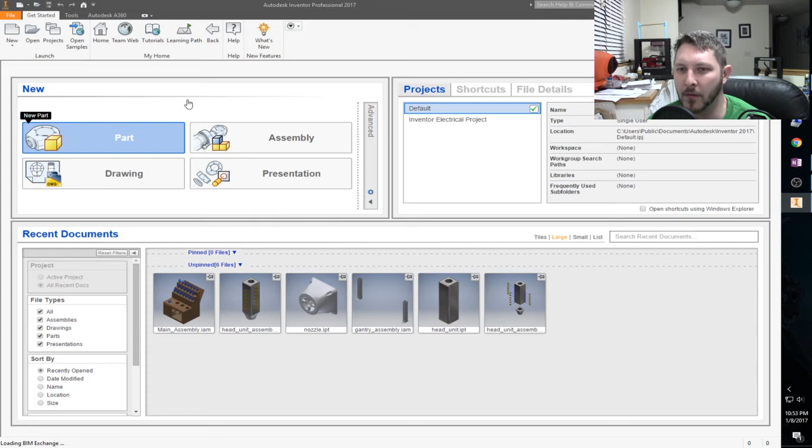So first off, let's get into this. We're going to start with a part. I'm going to use Autodesk Inventor Professional 2017, that's what I'll be using, and we're going to be creating this all together. So sit back, relax, and enjoy some time together while we see if we can create this up.

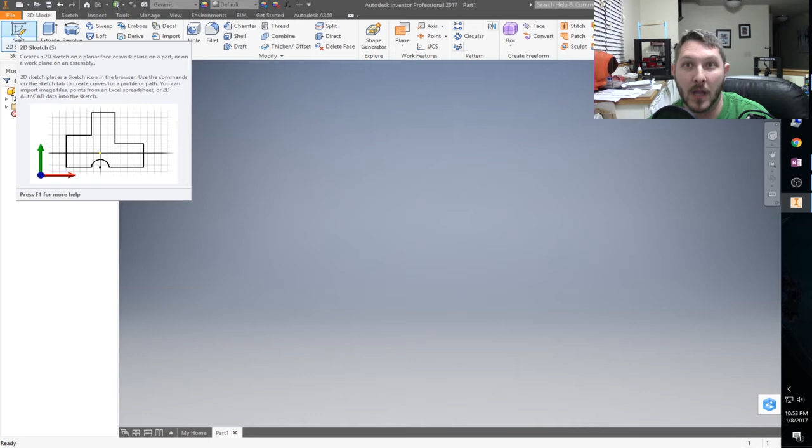So I have a Pokemon card. I actually have one, so I'm going to be measuring it whilst we speak. It's going to be rough measurements, got me a tape measure, so it's going to be rough measurements, forgive me as we go.

So I'm going to start a 2D sketch. Let's go the YZ plane. That's fine with me. So ultimately this is just going to be a rectangular surface.

So let me take a measurement. Oh, let's see, it's going to be about 2.5 inches wide. So let's go to the other one, 2.5 inches wide by approximately... get this on here and measure this out. Looks like 4, and let's see, that's going to be 1, 2, 3, 4, so 3, well it's 8, so that's going to be 1, 2, 3, 4, 5, 6, 7 sixteenths.

So, 3, is that what that is? It's going to be 3 and 7 sixteenths. So about 3 and 7 sixteenths.

So I'm going to, well, we better make it a little larger, right? We don't want to make this exact, because if we make it exact, then it'll just barely fit. Let's just round up, shall we? And let's go 3, or no, 2, yeah, 2.5 wide. Yeah, let's go 3.5.

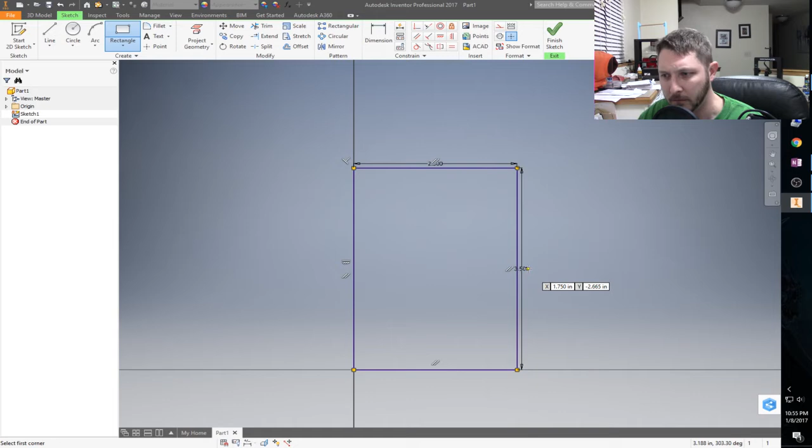And that'll be at first. We'll make the box as deep as a card is tall, is what we'll do for now, and we'll extrude this up 3.5. So we're going to finish the sketch, and then we are going to choose to extrude this up 3.5 inches. So it'll be just about as tall as it is long. So there we go, that should be 3.5 inches tall by 3.5 inches long by 2.5 wide.

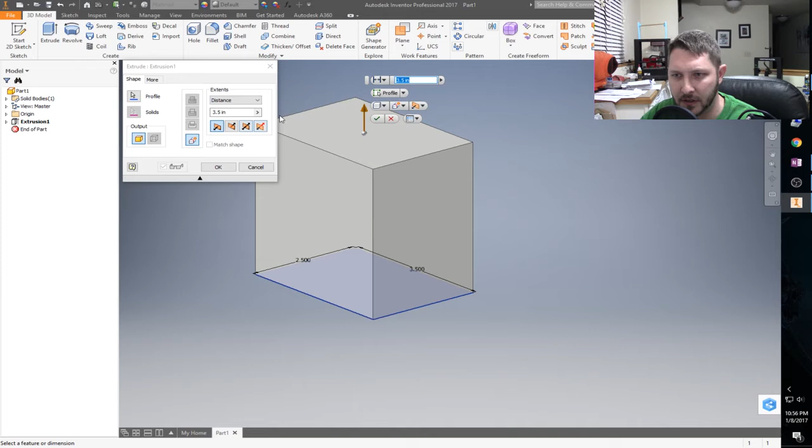Or actually, we want to make this where it's actually a double box where it has a lid. So let's cut that in half. Instead of 3.5, let's do 2.25 as my extrusion. To correct an extrusion, you just double click back on it. Let's do 2.25 tall, that looks a little better, that way it comes halfway up the card. Sound good? Sounds good to me.

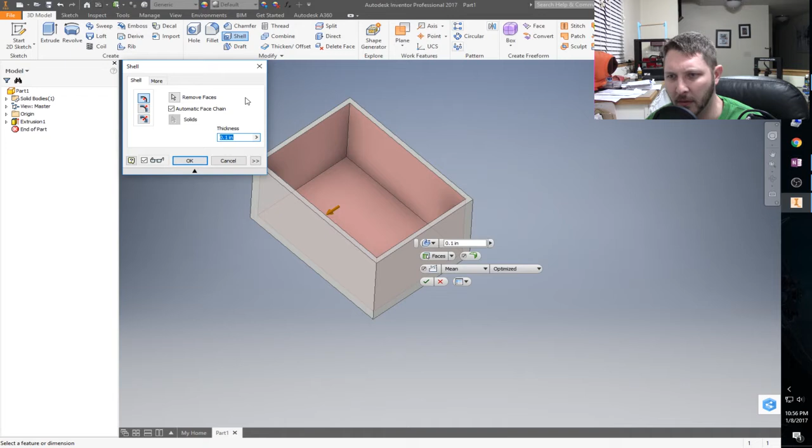All right, so now we got to hollow this out. So we are going to use the shell tool. We're going to shell it on that surface. 0.1 wall thickness, yeah that's probably fine. Let's give it a little more girth, let's make it 1/8 of an inch.

I'm here in America, so we do everything in standard. Yeah, I know, it's goofy. We got eighths and 16ths and 32nds and 64ths and weird stuff like that, but I don't know, I have thought in it for a very long time, so that's the way I roll in it.

So there's that, that's pretty nice. That's going to be the bottom. So what we're going to do is we're going to save this. Save, let's just put this, I'll put it on my desktop for now. We'll call this bottom box.

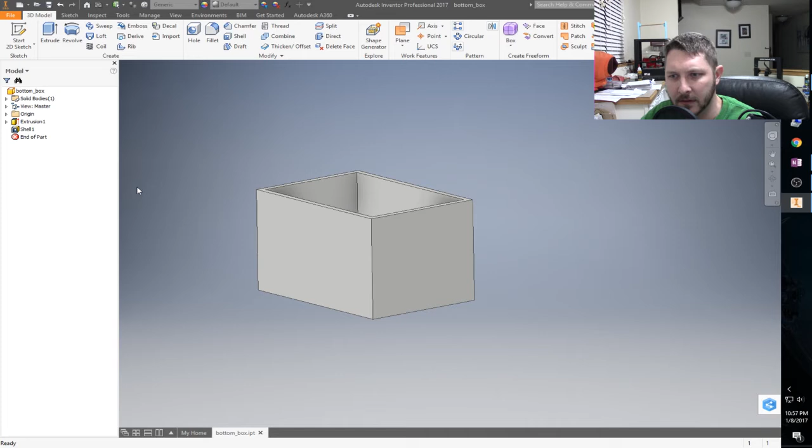Okay, bottom box. So now we need a new part. Come up here to my little quick thing here and hit new part. We're basically going to start a 2D sketch again. This time, this is going to be the top.

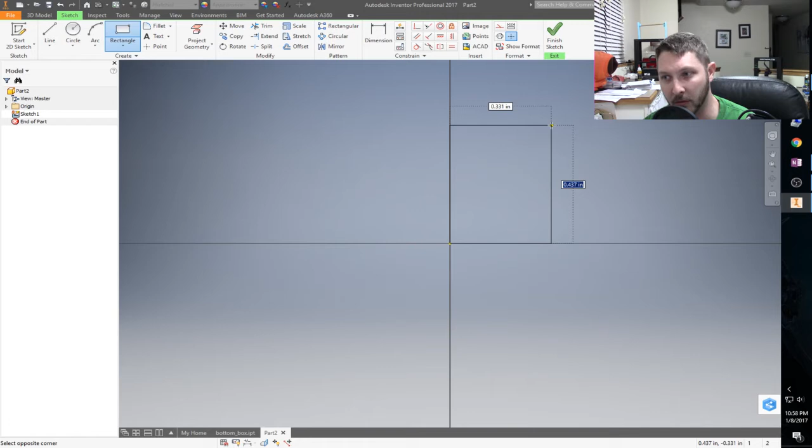If it's going to be 1/8 of an inch thick, we made that other one 2.5 by 3.5, right? So this one is going to have to be a little bit bigger. Let's go 1/8 of an inch bigger. But then we'll probably make the wall 1/8 of an inch, so let's make it 1/4 inch bigger. So if it's 2.5 by 3.5, a quarter more it'll be 3.75, and then the other will be 2.75. So there we go.

So now, since we got 2 3/4 by 3 3/4, we'll go ahead and extrude this up. Probably do the same thing we did before. What did we do that at, 2 1/4? Well, we probably don't want to do 2 1/4. Well, we probably could. Yeah, that's fine. So we'll do 2 1/4 like that.

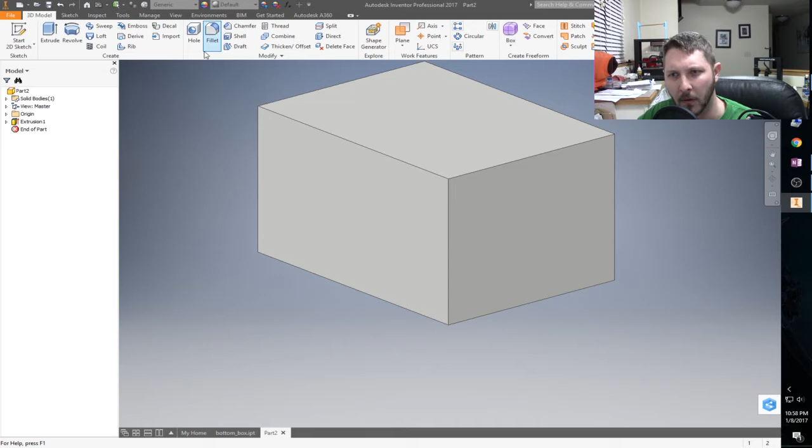But this time we want to go on the bottom. We're going to shell it out from the bottom. So we're going to do a shell, and then same deal. Okay, so that should be the bottom of it.

Okay, cool. Now, should we make these boxes look cool? At least this one, since it's the outside, what you're going to actually see. So let's make this look cool. Let's go with fillets, and let's fillet the corners. Why not, let's make it look cool. A 1/4 inch fillet looks fine, or 1/8 inch fillet looks fine with me. So I'll round that all out.

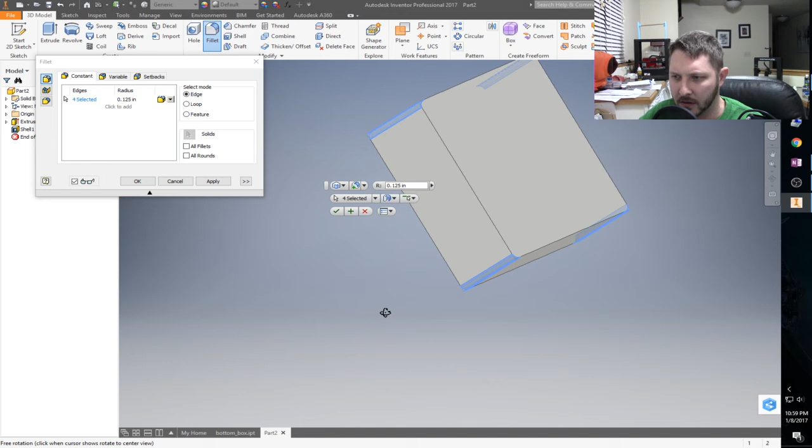Should we go ahead and do these sides too? Might as well make it look pretty. Okie dokie smoky, there we go. Doesn't that look just spiffy?

Now, if I remember right, there is a way that we could emboss on here. Ooh, we could emboss on here a Pokemon deal. So let me see if I can find an image.

Okay guys, I think I figured it out, or at least figured out a different way around it. I'm going to be using a Pokemon font from dafont.com. So what we did was I downloaded that as an executable, extracted it here, so I've got a Pokemon Hollow Text and a Pokemon Solid Text.

Now all you do, if you're using Windows 10, is you just go to fonts in there, and then you just literally drag and drop them into here, if you don't know how to do that. If you're using Windows 7 or the other ones, it's in your control panel. You just open up control panel, and there's a fonts control panel object, you click on it, and it opens up this folder. So real easy to install fonts.

Then of course you have to restart your software, so I shut down Inventor, and I'm going to fire Inventor back up again. So we'll give that just a few seconds to come back up. Gosh, it's just a pain. I think it'll work easier with a font than the other way.

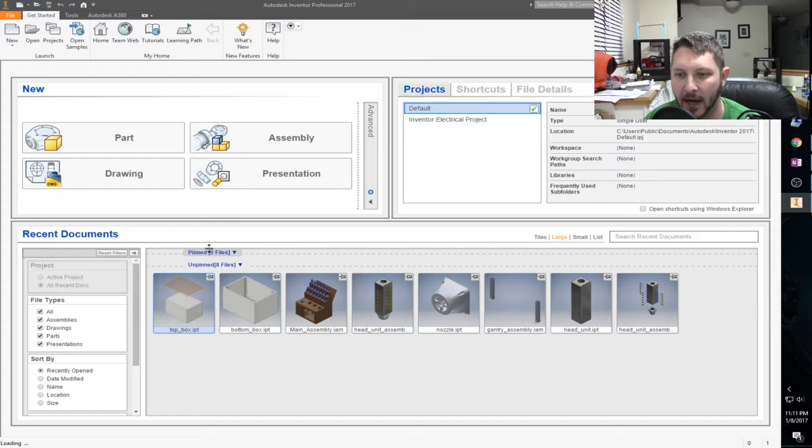So what we're going to do is get the top of our box back. So wait for that to load up. There we go. Alright, so now our sketch number 2 is what we were using. I'm going to roll this over to the side here. So now I'm going to insert some text.

I'm going to change this to the Pokemon Hollow font. I'm going to say... ooh, I don't know how to do the funny E. How do you do the accent E? Does anybody know that? Hold on, let me get this bigger first.

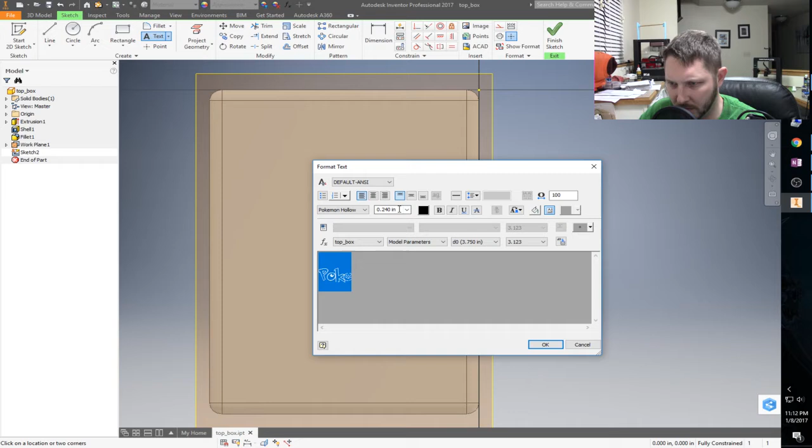1/4 inch, nah, let's do 1/2 inch baby. Oh, that's not what I wanted. Oh no, open that up. There we go, okay, that's fine.

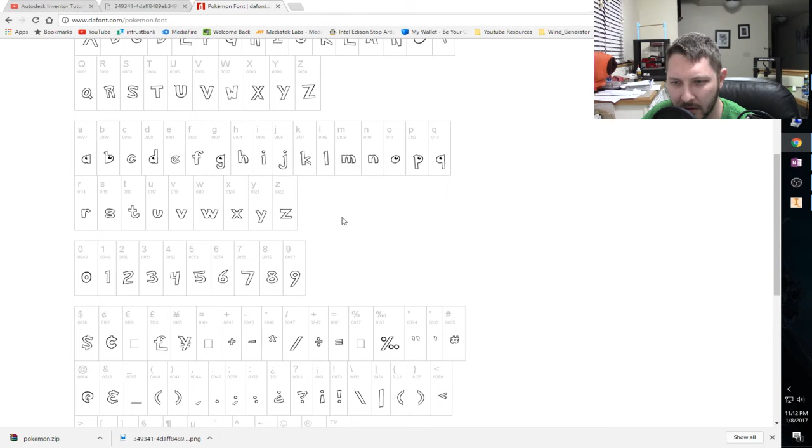Ooh, we're gonna have to rotate it. Is that uppercase, lowercase? Yeah. Does anyone know the alt code for the accent e, or whatever? Because you need that. Do they have it in here? Do they have it? I want the lowercase version. There it is, oh my gosh. Is it an E like that, or is it a... what is it? I think it's an E like that, right? Right? What does that say? An E like that, that's a... oh my gosh, I can barely read that.

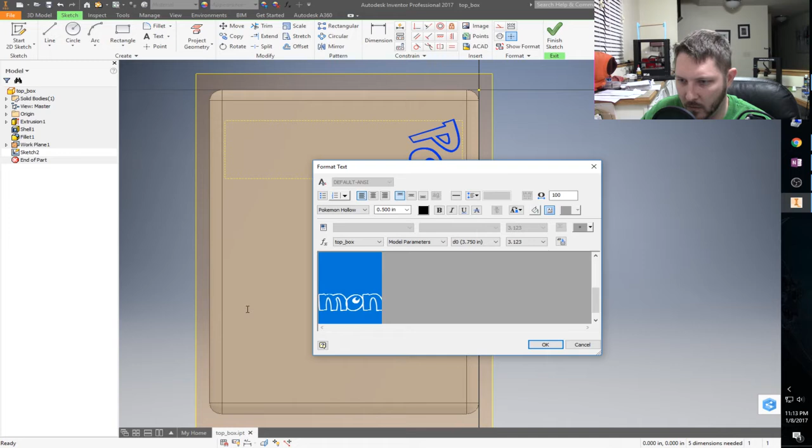233, I think, 0233. So the theory goes, if we hold down Alt, 0233. Oh yes, Pokey, and then what is it, M-O-N? Pokemon! I am not a Pokemoner, just so you know. Oh my gosh, what happened? Oh, I see. No, actually, I don't see.

Okay, so... I think it'll be okay if I just hit okay.

Alright, so what I need to do with this, though, is I need to turn it the other way. Well, of course, I don't know.

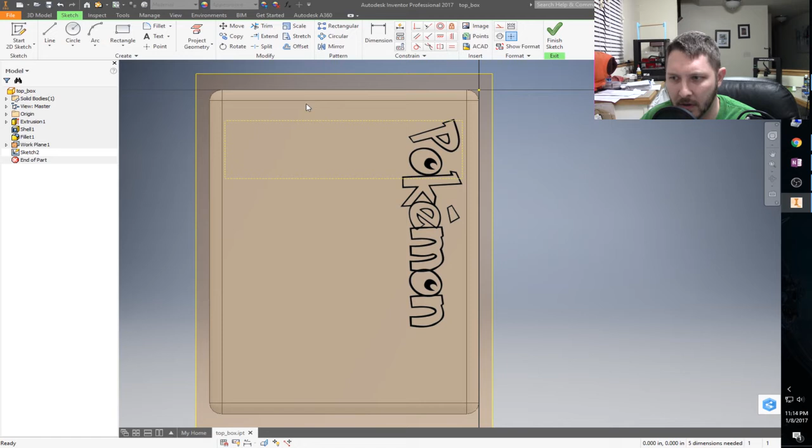That is kind of cool along the side there, don't you think? Does that look cool? I don't know. If you're a Pokemoner, do you like that? Sure, looks good enough for me.

Looks good enough for me. Select a base point. There. That's weird that it's like... Okay, well, whatever. That's actually kind of cool, like along the side.

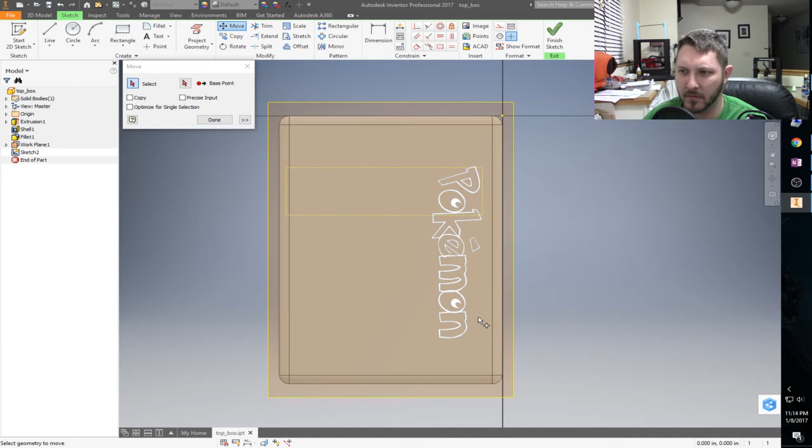I kind of think I might like that a little better, actually. It looks pretty cool. Base point, I'll just kind of eyeball it in, make it look cool. Look good to you? Look good to me. Okay, so now we're gonna finish the sketch.

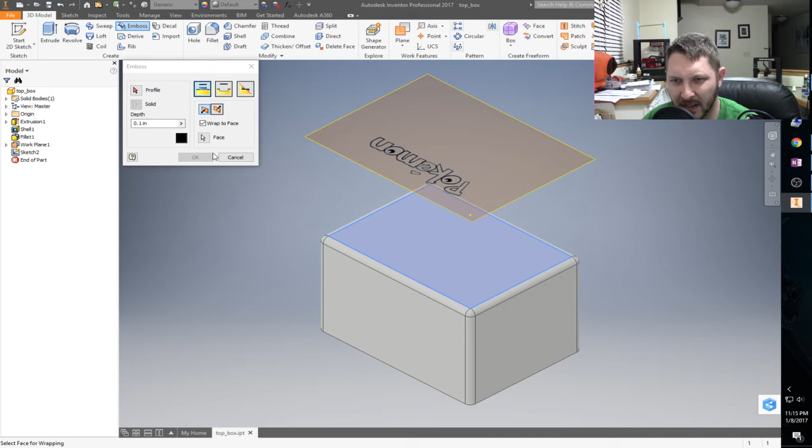Wrap to face, face, yes, that face. Select the profile. Emboss from face. Engrave from face. Yeah, emboss from face. I'm gonna hit OK and see what happens.

Oh, we should have done the solid text. Crapamundo, because it's going to be all hollow. It is kind of cool, though. Okay, let's back up, because we got to fix it.

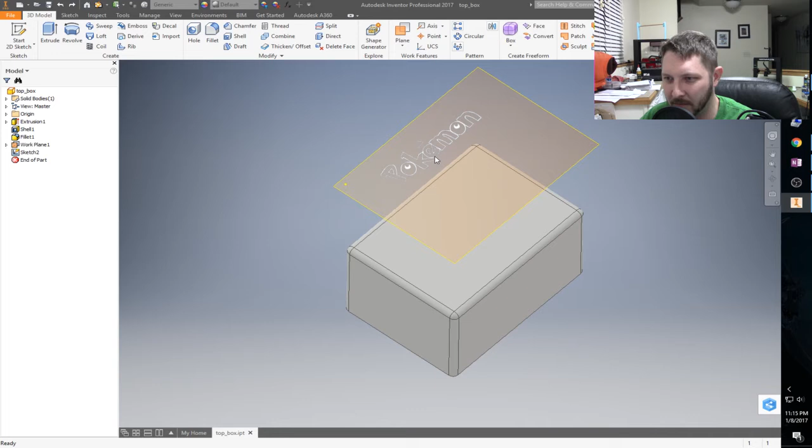Okay, sketch. So I thought we needed the hollow. Apparently I was wrong. We need the solid Pokemon logo. There we go, Pokemon.

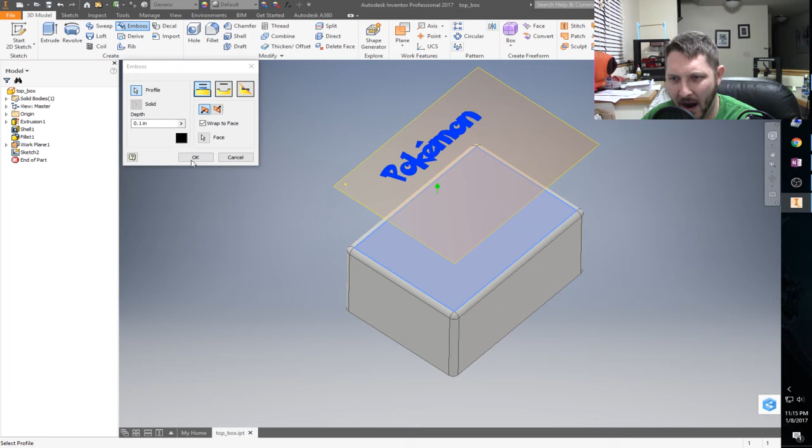Emboss, same deal. We're going in that direction, that way. Profiles there. We're going to wrap to face. We're going to select that face. Profile is going to be the Pokemon, and 0.1 inch. Yeah, that's fine, about an 1/8 inch extruded. Okay, doke.

Oh, how cool is that? My son's going to love it. Let's get this workspace out of the way. Dude, my son's going to freak.

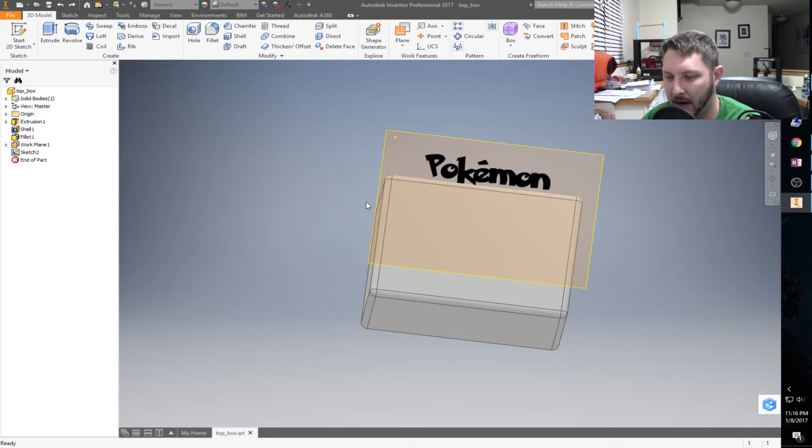Ooh, you know what I'm going to do actually? I'm gonna make it where my son's gonna freak out even more. Let's back up. Okay, now in the same font, let's put his name on it. Oh yeah, he's gonna freak out if he sees that.

Alright, so let's do the same thing. So text, yeah, text again. We'll go this way and get the Pokemon, solid. And my son's name is Trent. So we'll make this 1/2 inch.

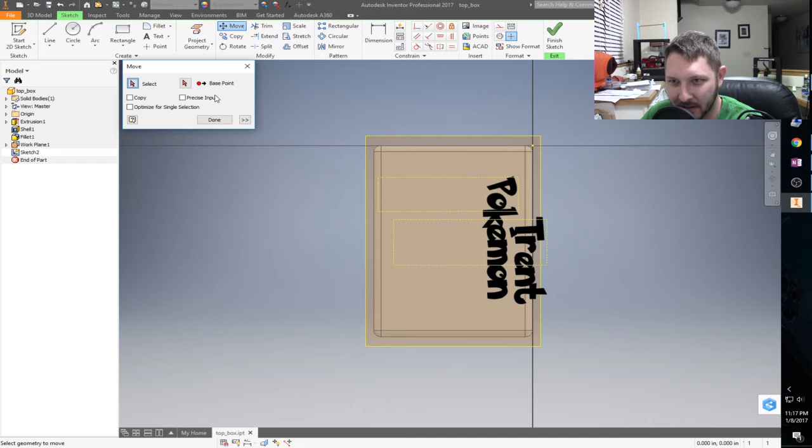Oh, he's gonna love this. He's just gonna flip out when I show him this. I can't wait to print this now.

Oh, we gotta select the object here. I want that. Give me a base point. I really don't care, just give me a base point. There, we'll just put it like that. Finish. Yeah, that's going to be awesome.

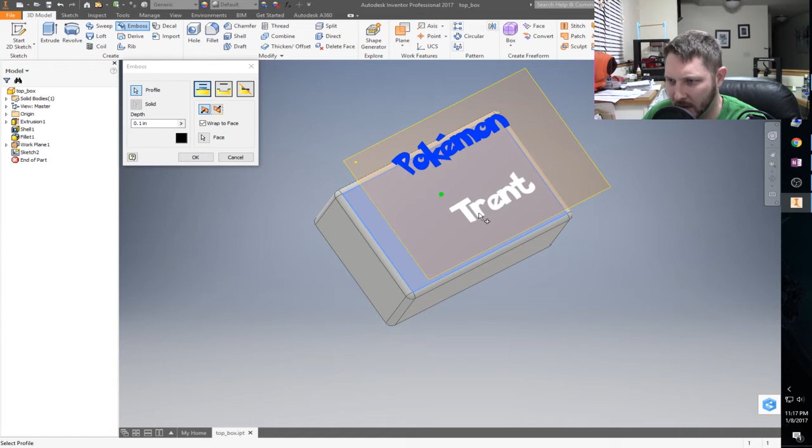Okay, emboss that. Want that direction. We would actually extrude it, wrap to face. We want that face, profile, this one, and that one. And we hit Okie Dokie Smoky. Oh, that's awesome. That's so cool.

Visibility off. 3D printing is wicked awesome, man. It really is. Okay, so there we go. Pokemon.

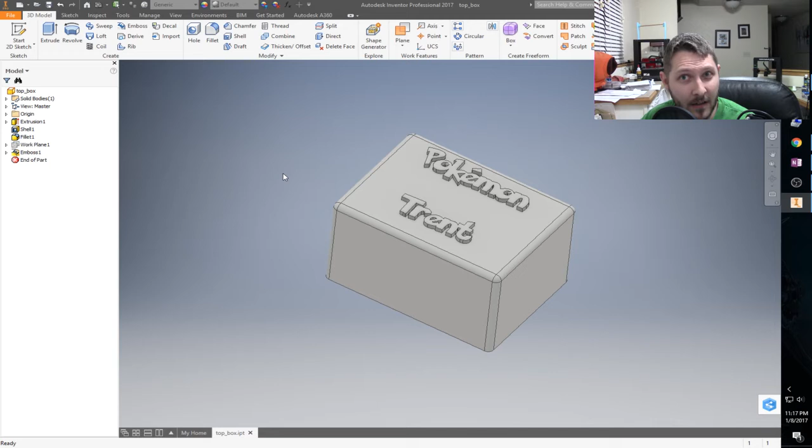Now, to make sure that this all fits, I'm going to go ahead and do an assembly just to make sure that it all fits together the way I think it's going to. And who knows, I'm thinking about on the inside to put a lip on the inside, to where this box lid will actually stop before it actually crushes the cards. So that way, if he throws this around or sits on it, it doesn't smash the cards.

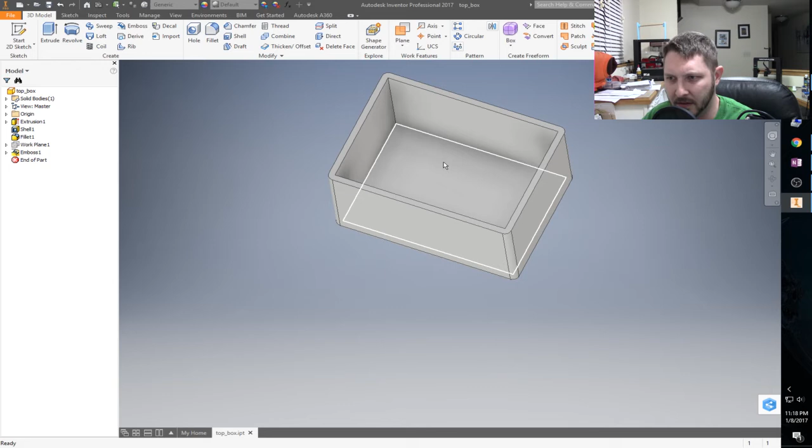It'll stop. So I'm thinking about putting a little lip, like a little lip ring, on the inside here. I may do that with some sketches on those side walls and do a little lip extrusion. So that pretty much has that. So what I'm going to do now is save all that, because that is awesome.

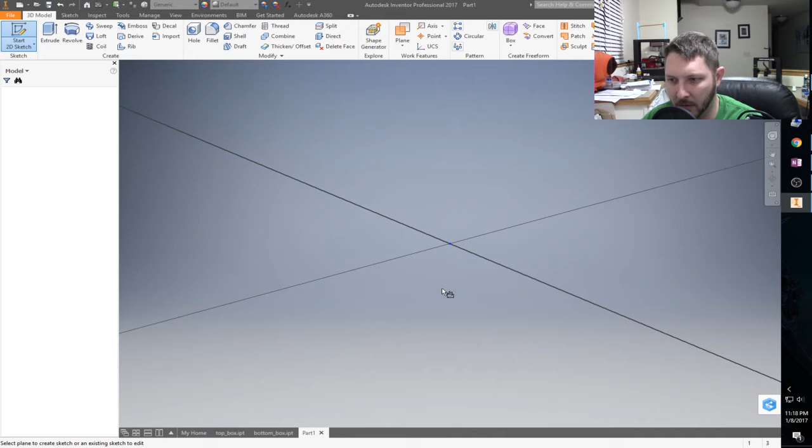And so then we have the bottom. We do have the bottom. There's the bottom of the box. And so what I'm going to do is create one more quick part, and I'm just going to call it card. We're going to make it just like a Pokemon card, so we can check sizing, and make this exactly the same.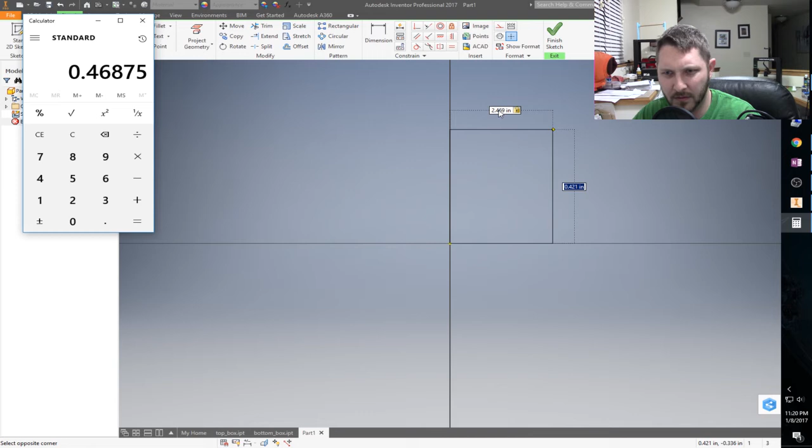46875, right? 15, that's about the same thing. Wasn't that what the other one was? 30 seconds, wasn't that what that was? I don't remember, 46875. Yeah, 46875. So 3.46875. There we go.

And that's the card. Finished sketch. Oh, I don't even know how thick to make this thing. It's paper thin. Well, 0.01. Sure.

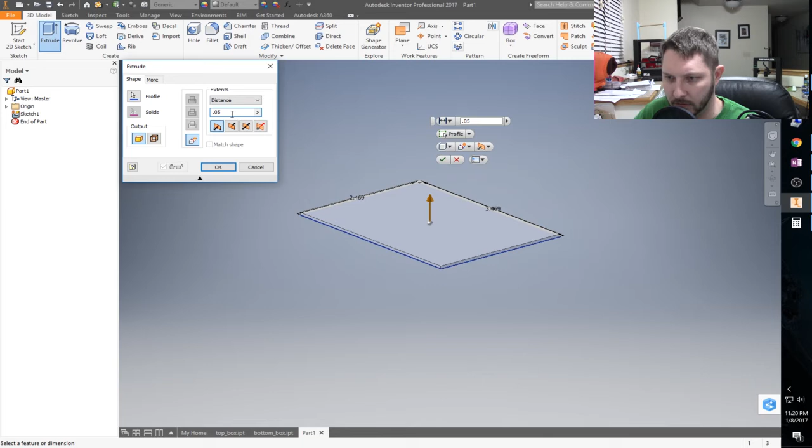Yeah, that'll be thousandths. 0.05. No, 0.01 is good, 0.01. It's a card, man. Who cares?

Oh, and do we want to be anatomically correct? Should we fillet the sides because it's anatomically correct? So that way it actually does look like a card.

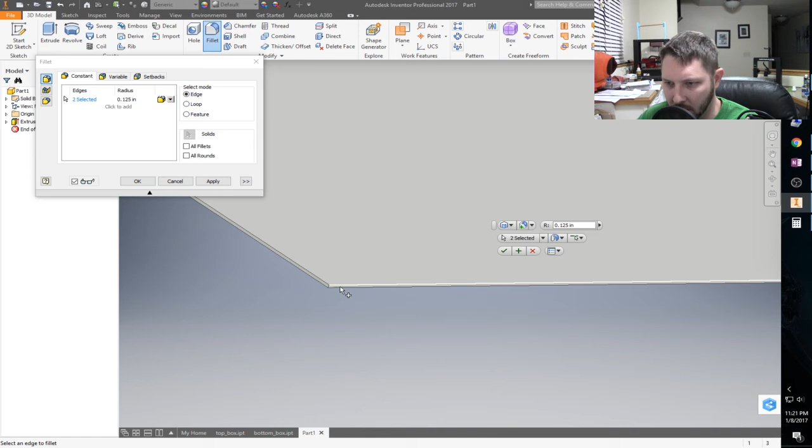Come here, Zoom. Work with me. Work with me here. Boop. And boop. Okay. There. Now it looks like a Poke card. Okay, let's see. We're going to call this card.

Okay. Sorry, had an itch.

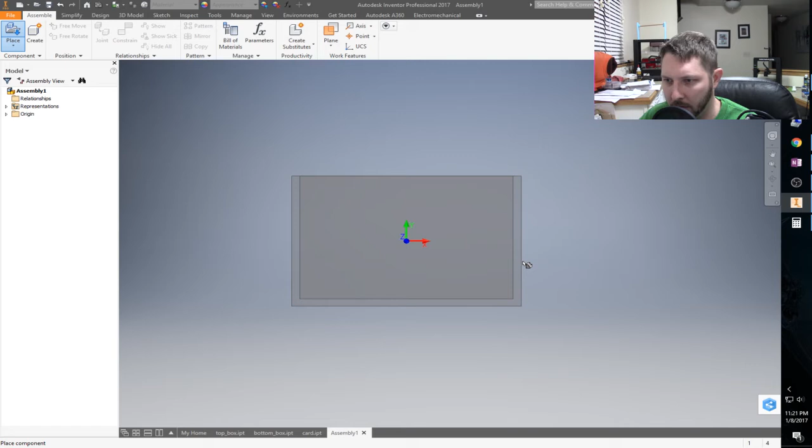All right. So now we're going to really quickly create an assembly. Hopefully, quickly place. Get my desktop going here. Oh, desktop, come on. I want the bottom of the box first. Sure, put that somewhere. There we go. Good enough. We're going to ground this so it doesn't move.

Where's it at? There we go. Grounded, so that way it doesn't move. And now we're going to place the card. Just stick that somewhere. And then I want the top of the box. And we'll stick that somewhere too.

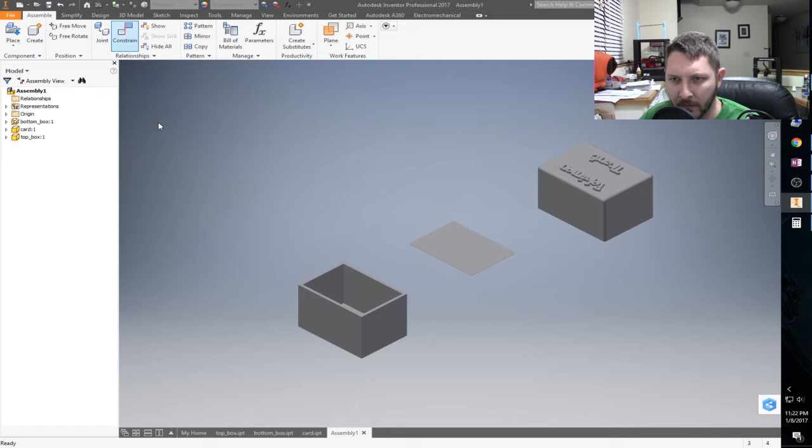So now what I want to do is constrain the bottom of this card with the bottom of that box. There we go. Fine with me. And then next thing I want to do is constrain the side of that card with the side of that box. Okay, there, that way it's in there.

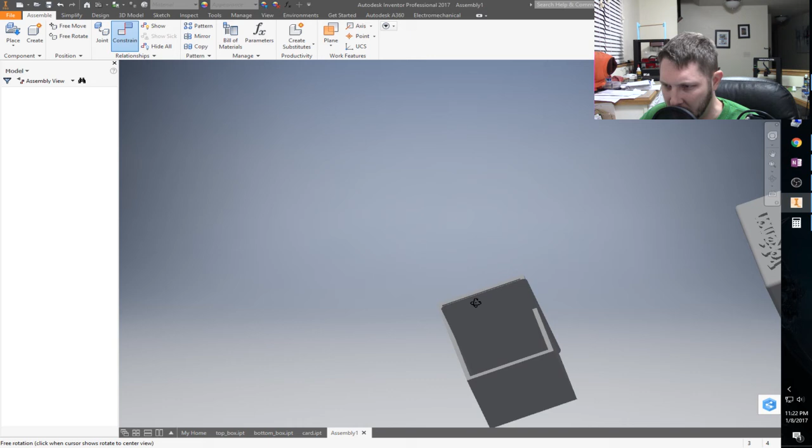Oops, look at that. So we've already got a problem. So why is that like that? I thought we made that 2.5. Oh, but we came in 1/8 of an inch. Ooh, I didn't add it to both sides.

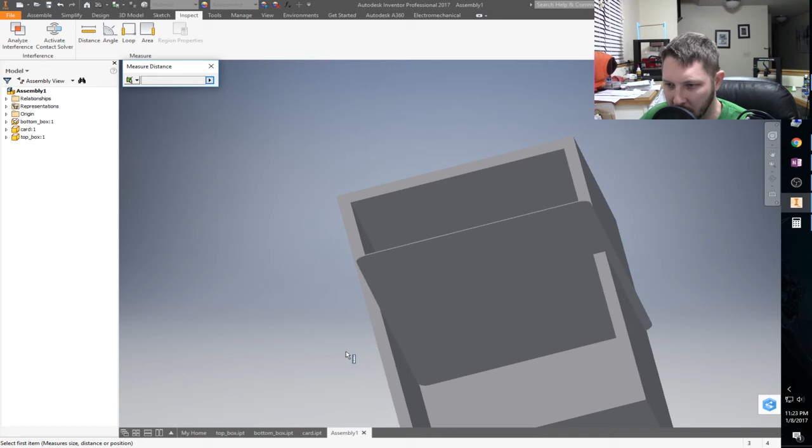That was my bad. So do you see what I did there? So if I take a distance and I go from there to there, it's 2.5 inches. However, the problem with that is this is actually bigger than 2.5 inches.

But see, that's for the whole thing. I mean, I took out 1/8 of an inch on both sides, so I actually need to add 1/4 of an inch to that. So instead of it being 2.5 inches, it needs to be 2 3/4. So easy enough.

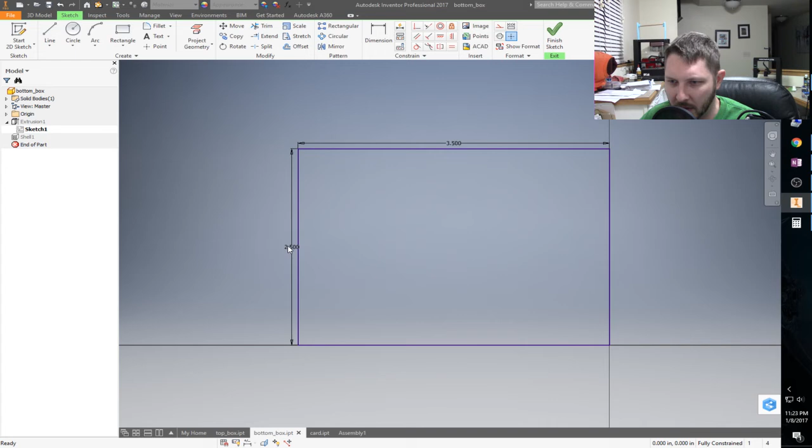Just double click on it, brings us back to it. And we go to our extrusion, go to our sketch. We make this guy 2.75 instead. That should widen the box out.

There it goes. Now if we go back to our assembly, our card now fits inside. Woohoo! And theoretically there should be a gap. Yeah, so there's a little bit of a gap because I constrained it to the side here, so there should be a little bit of play for the cards. You know, they can wiggle around in there a little bit because not all cards are probably created equal.

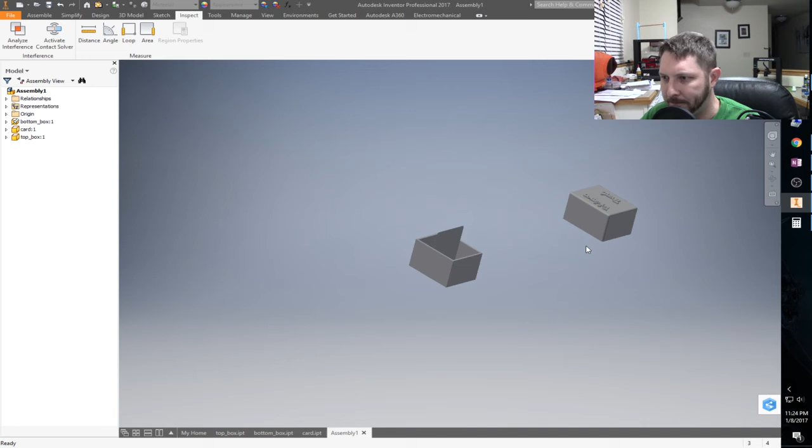All right, so now the next thing that I want to do is I want to do some more constraining. I want to constrain the inside of this box with the outside of that box. Boop, just like that. And we're going to say, okay.

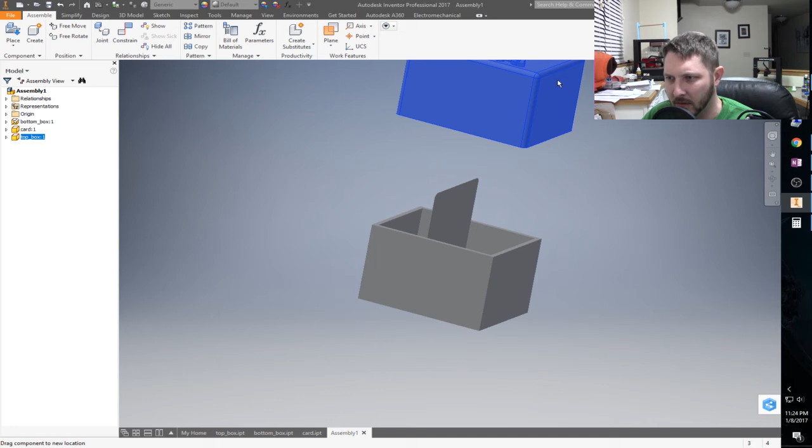Now, I don't know if this is going to work. Now it's going to go all over the place. Okay. And then when I move it up here, I want to also constrain the inside of that side with the side wall of that side.

Oh ho. Found problems. Okay, now, yeah, that's right. Because now that we made that wider, I need to add another, what, 1/8 of an inch? Exactly, pretty much 1/8 of an inch to the side of this. So let's go ahead into there.

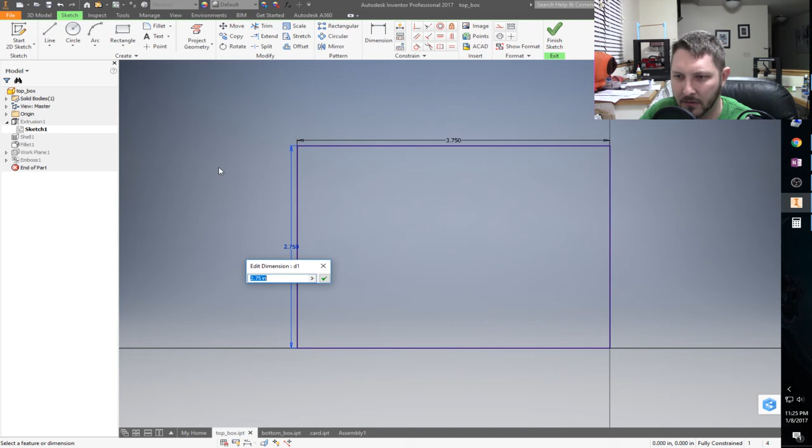Go into our extrusion. And we added, I can't do math right now, so 750 plus 125 is 875. That's right. So we're going to go 875. Yay.

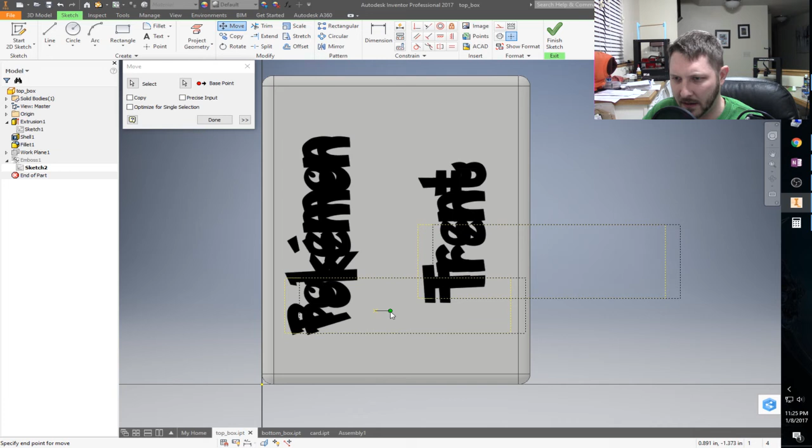Widen that out a little bit. Emboss. Let's take this emboss sketch. We're going to scoot that down a little bit just because this guy and that guy, base point. Let's scoot that down a little bit since it got wider on us. There we go. I should move the embossment. There we go. That still looks awesome. That's so awesome. Assembly, now we should be bigger.

Oh, except I forgot, you have two sides. You have both sides. Well, shows you how much I know. So go back into that. We got to basically do it again.

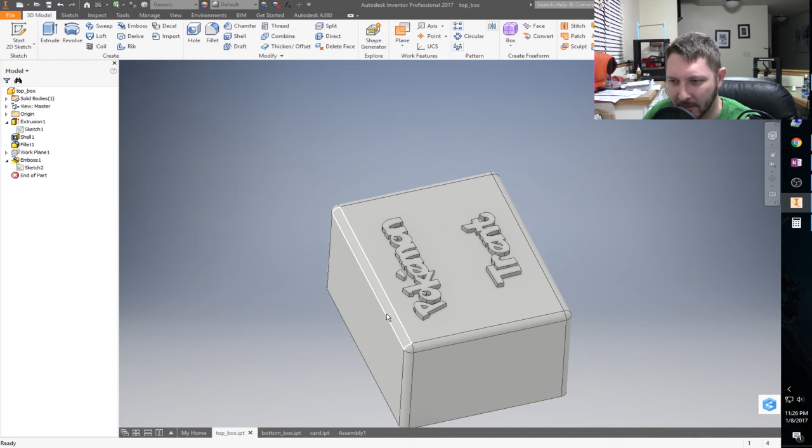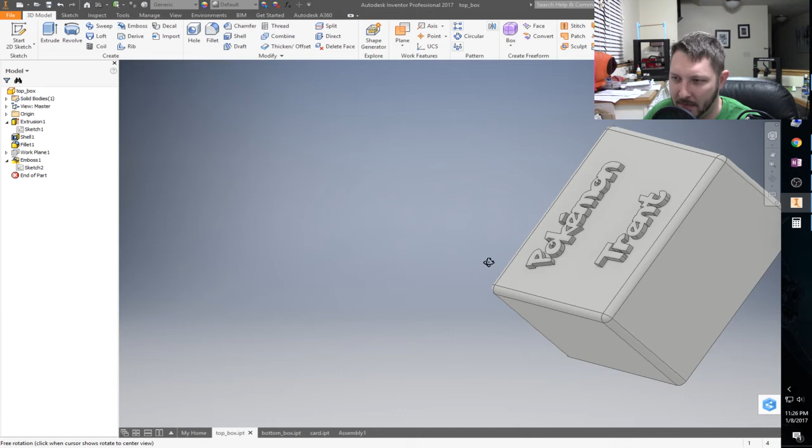Oh yes, yes, that looks marvelous. All right, marvelous. Okay, so assembly, now we should be all the way around it. Woo, look at that. Of course it's like, boom, bottoms out right there.

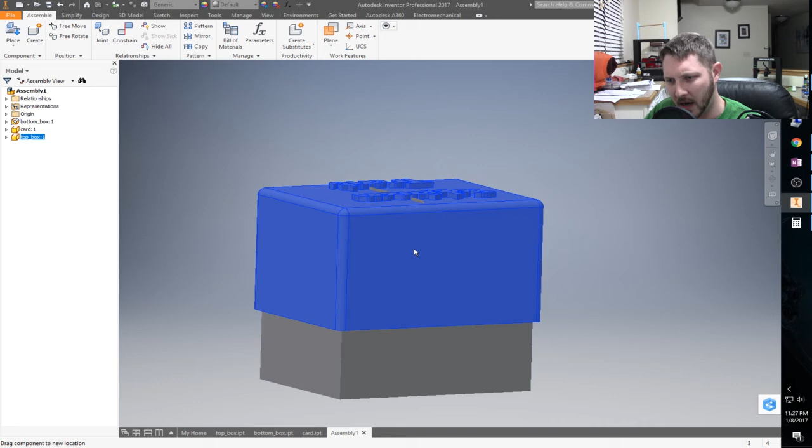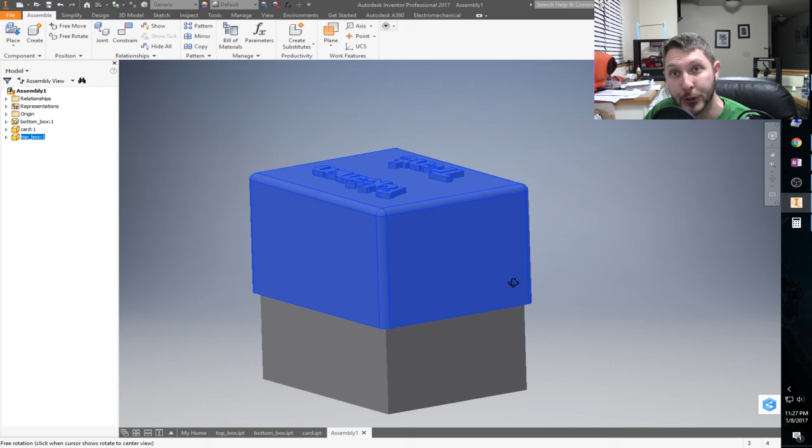I may or may not put a lip around it. I think for now that's probably pretty good. We can 3D print these pieces and see what it looks like when it comes out. So in order to do that, actually, I don't like this being perfectly square on the bottom. I think it needs a bit of filleting to make it look pretty. It needs to look like the top.

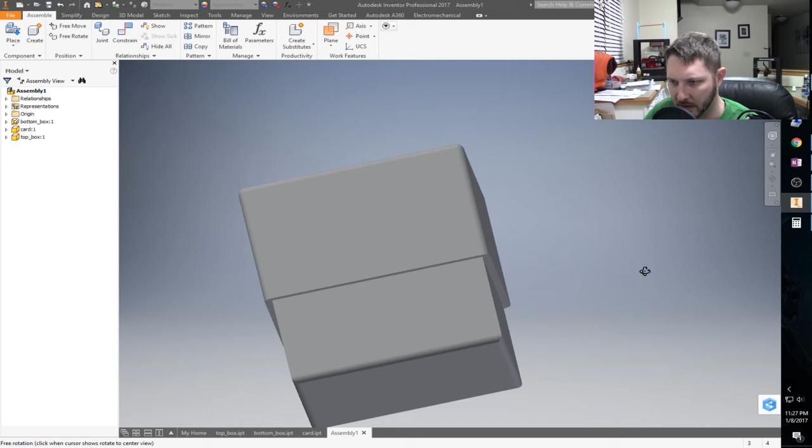Let's get some filleting going on, get your fillet on. That way it'll look like the top. There we go, assembly, that looks a lot better. Now that looks spiffy. Okay, so now I'll save this assembly.

I'll call it main assembly. Sorry.

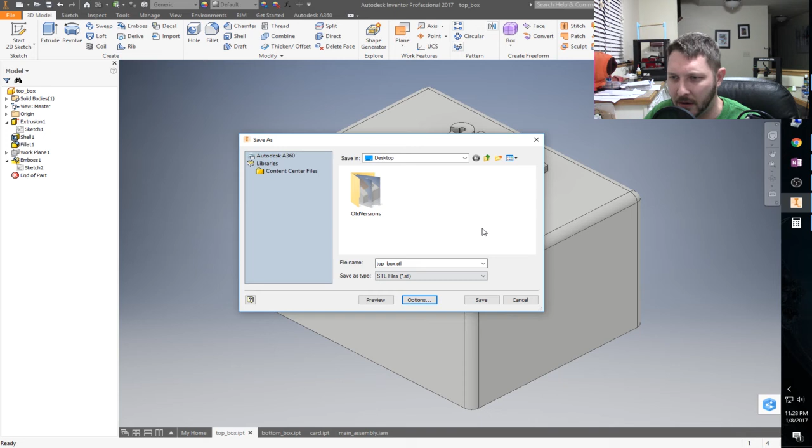Okay, so now what we're going to do to export this from Inventor: you go to File, you go to Export, you go to CAD Format, you go down here to our good old STL, click Options, make sure millimeters is chosen, because most 3D printers are millimeters. Okie dokie smoky. And then we are going to save that on the desktop.

Then for the bottom of the box, we are going to do the same thing. File, Export, CAD Format, make sure we're still in millimeters, and save.

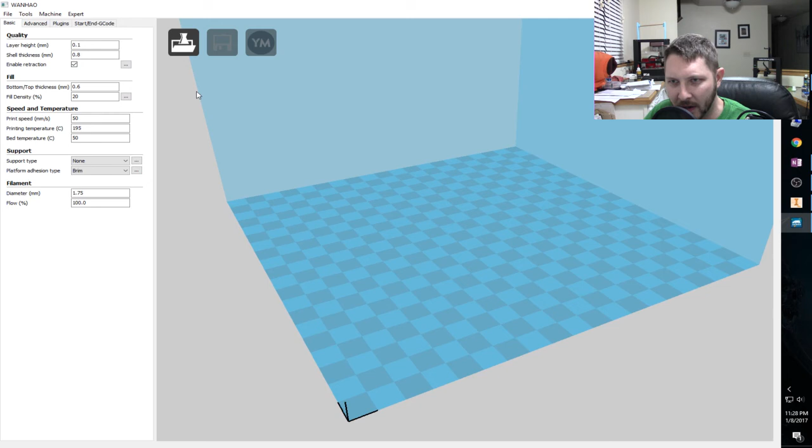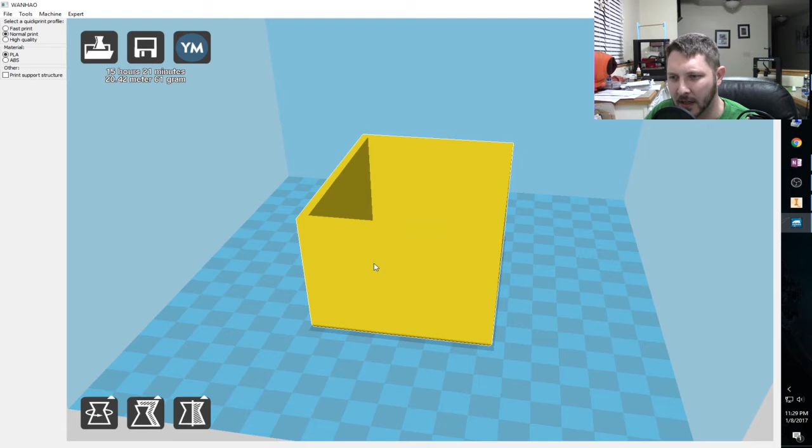All right, 15 hours, wow. Maybe I shouldn't have made it so thick. Sucker's like a beast. Well, anyway guys, that is basically what we're going to do.

I'll 3D print this out. Maybe I'll put it in another showcasing video, because this one I guarantee is really long. So anyway, what have we got? Yeah, this one's already like a 20-some minute video. Or maybe even 30 minutes. All right, so guys, with that, thanks.

Stay tuned, I'll probably have like a part 2 to this where we'll 3D print it out, and we'll be able to, I'll hopefully get my cameras set up so you'll be able to see the 3D printer printing and all that stuff, and we'll do a time lapse where it speeds it up.

So guys, thanks a lot for hanging with me through all my bumbling and messing around through here. But it's fun, it's fun. It's good to see the thought process of how to fix things and change things around, do things different ways and stuff like that. It's good to see the thought process. So I'm glad that I kind of fumbled around through it, that way you guys could see me fix things.